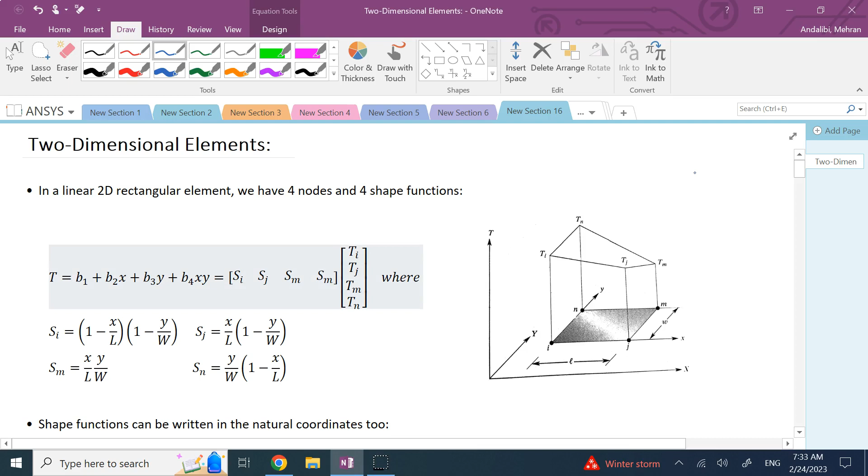We can also write it as the dot product of the nodal values and the vector of shape functions. The shape functions at nodes i, j, m, and n are functions in terms of local coordinates. We can also write them in terms of natural coordinates, using the parameters xi and eta, which are defined based on x, y, l, and w. Then we write our shape functions in terms of these two parameters.

If you remember, we put the origin of the natural coordinates at the center of the element, so the four corners have values of positive or negative 1 for xi and eta. These are the shape functions, and each one is 1 at its own node and 0 at all other nodes. The same properties that applied in 1D now apply in 2D.

So this was the linear rectangular element. Along each edge, whatever the quantity is—temperature or otherwise—it changes linearly. Now we might have a higher order rectangular element, which we call quadratic, or second order.

Here you also have four nodes in the middle of the edges, so you have 8 nodes and 8 shape functions. Written in terms of natural coordinates, this time you don't just have linear and bilinear terms—you have quadratic terms as well, and it also gets to the product of linear and quadratic. So you need 8 coefficients, giving you 8 shape functions and 8 nodal values.

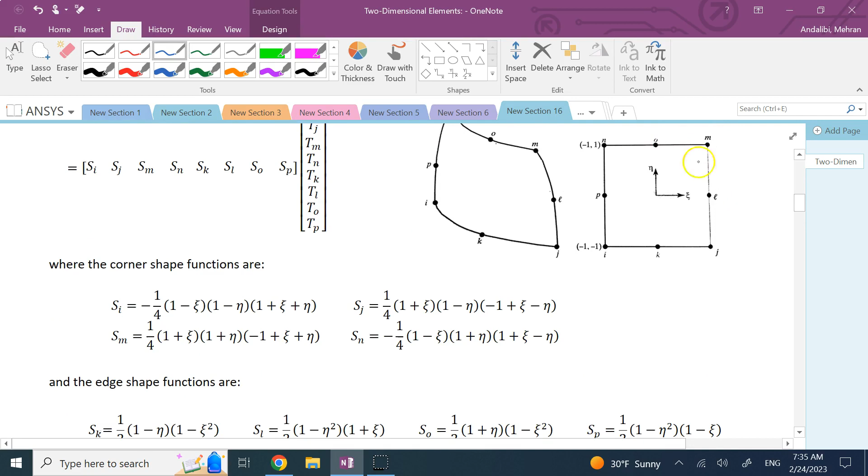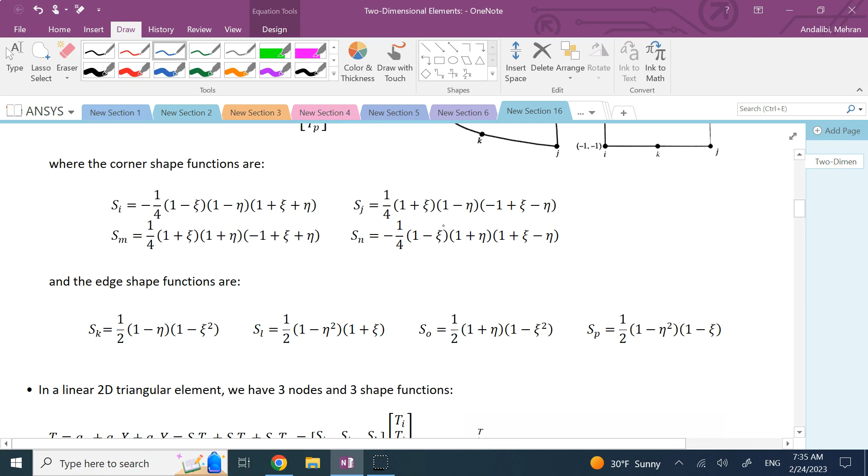The corner shape functions, at i, j, m, and n, are given by these functions, and the edge shape functions in the middle, k, l, o, and p, are given by these other functions. The same properties apply here—they are 1 at their own node and 0 everywhere else. So this is the quadratic rectangular element.

Now we can go to triangular elements, first linear, then quadratic. For the linear one, there are only 3 nodes and 3 shape functions, so we need 3 coefficients in the polynomial, written in terms of global coordinates. For triangular elements, we mostly deal with global coordinates instead of local.

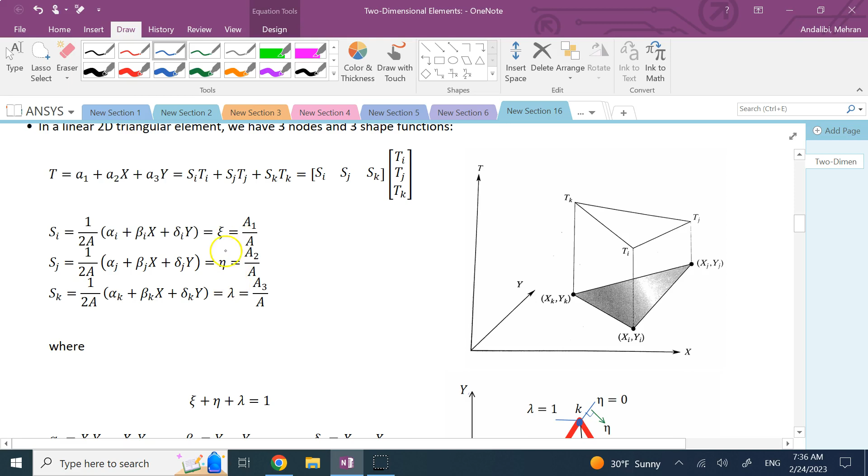So you have 3 shape functions, determined based on the parameters alpha, beta, and delta, and A, the whole area of the triangle. These shape functions are also the same as your natural coordinates, and they are the same as the ratios of A1, A2, and A3, which are the three areas split by a specific point P.

If you move point P anywhere, these three areas change, and the coordinate of P changes—it's the ratio of these three smaller triangle areas over the big triangle. So the sum of these three parameters equals 1, and your alphas, betas, and deltas are given based on the global coordinates of the corners.

So when I deal with global coordinates, I really need two coordinates, x and y. When I deal with natural coordinates, I need three of them, but one depends on the other two—so you have one redundant coordinate. In general, these are your shape functions. As I said, it's always easier for triangular elements to define everything in terms of global coordinates.

But for rectangular elements, it's most of the time easier to define everything in terms of the local coordinate, although here we also have a natural coordinate as well.

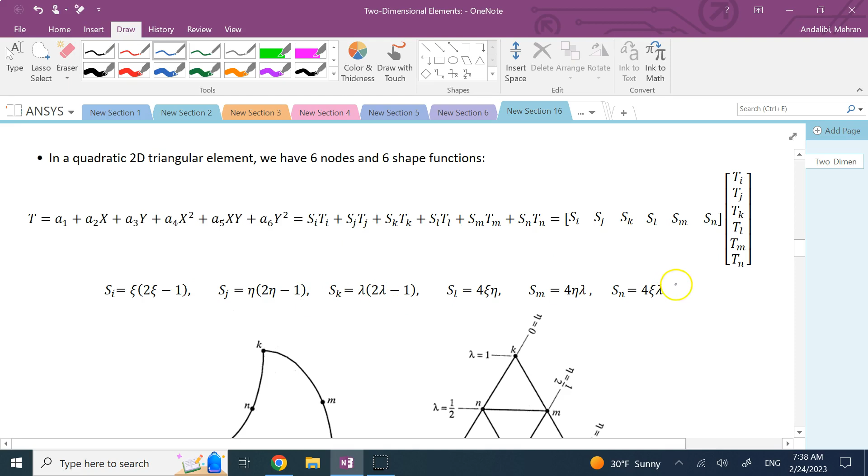And then, of course, we have the triangular element which is quadratic. Now we also have one node in the middle of each edge, so we have 6 nodes and 6 shape functions. The 6 shape functions, again based on the natural coordinate, are given as you can see down here, based on xi, eta, and lambda.

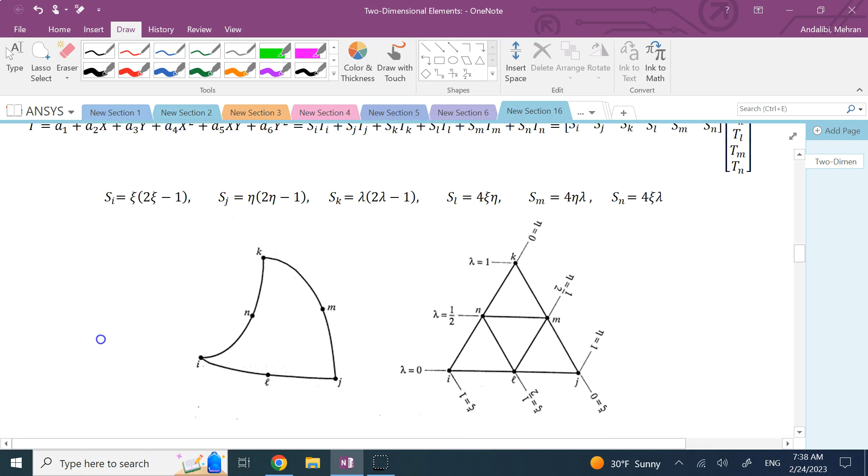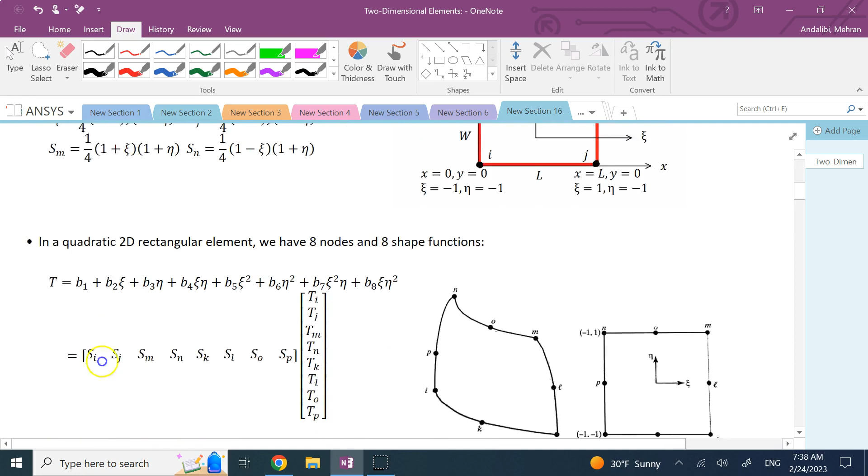So these are the 4 most commonly used 2D elements that you can use in finite element. There are others, but we're going to skip those for the sake of time.

So the next problem that we're going to see as a real example is analysis of 2D heat transfer problems. The governing equation inside the physical material is basically kx times the second derivative of t with respect to x, plus ky times the second derivative of t with respect to y, plus q dot, where q dot is the amount of heat generated per volume. So this term is going to be 0.

So this is basically the net heat coming inside the element and outside, the sum of the inside and outside. Here we can assume that the conductivity of the material K is not the same in x and y. Most of the time these two parameters are the same, but if the material is not isotropic, then these two could be different.

Q dot is the amount of heat generated inside the material, inside the volume, per volume. So if there is some heat source or heat sink in the part, this number is going to be a positive or negative number.

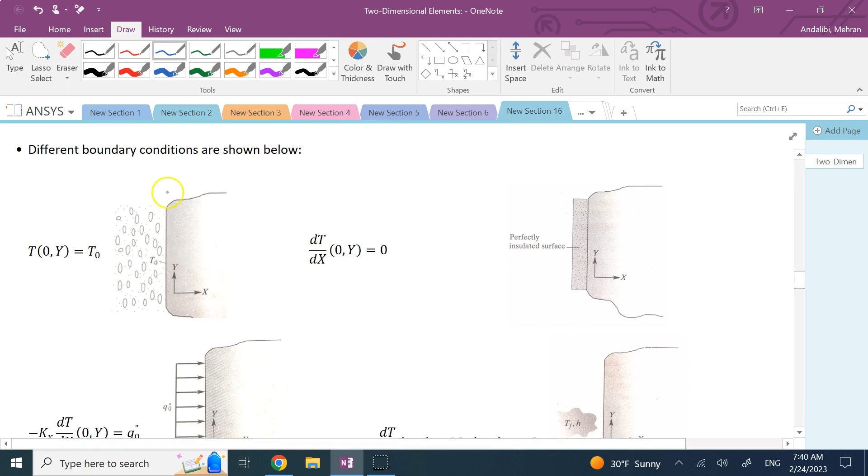And then there are different boundary conditions. We can have constant temperature at some edge, for example on this vertical edge where x is 0 and y can change, then the temperature can be held constant. We can also have the condition where the material is perfectly insulated on that edge, meaning the derivative in the x direction for temperature at that location is 0. Now if the edge is horizontal, then the derivative of temperature in the y direction is going to be 0 for that direction.

Which means the heat flux, Q double prime, which in this case is ky times that derivative, should be equal to 0. In this case, this is kx times that derivative, but kx is a constant, so we can cancel it from both sides. So the edges could be horizontal or vertical; in this case, we just consider vertical edges.

Then we have a constant heat flux through that boundary. If we know how much that constant heat flux is, then this is the equation for it. And if it's just an element like anything else, the heat coming through it is equal to the heat given to the environment by convection. So it is subjected to convection, then this is the equation: the heat coming in this direction is equal to the heat going to the environment through convection. This is Newton's cooling law.

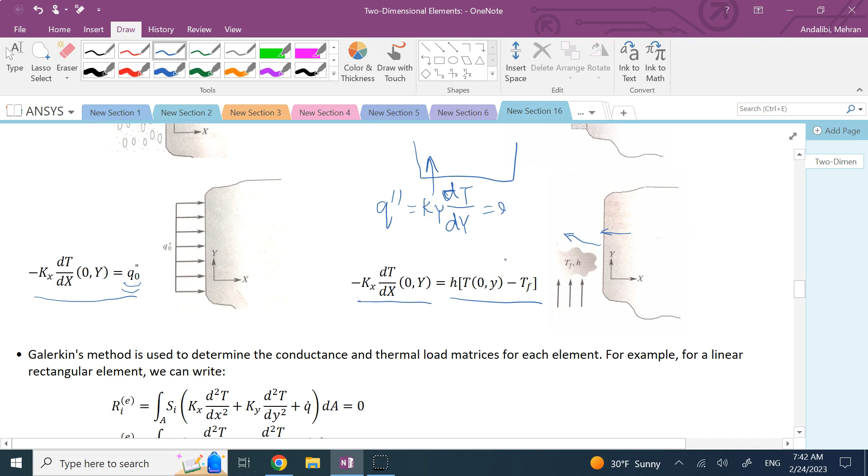So these are different boundary conditions that you can have, and this is your governing equation, second order and linear. This is your basically non-homogeneous term in general.

So here, if we want to formulate this problem, we are going to use the Galerkin's method, just like we did for 1D problems. Then what we do is at different nodes, we calculate the residual terms, multiply them by the weighting functions, and set them equal to 0.

If you remember, the residual terms come from guessing some t as a function of x and y in this case, and plugging it into this differential equation. Since it's not the exact solution, the right hand side is not going to be equal to 0, so we call that a residual term, which you can see here. Then we multiply each residual term by the shape function, or the weighting function, of that corner, that node, and call it the residual term for it. The goal is to get these all to 0.

So then we can write all of this as the residual term for that location times vector s, and vector s here is clearly Si and Sj, and then Sm and Sn transpose, in this case.

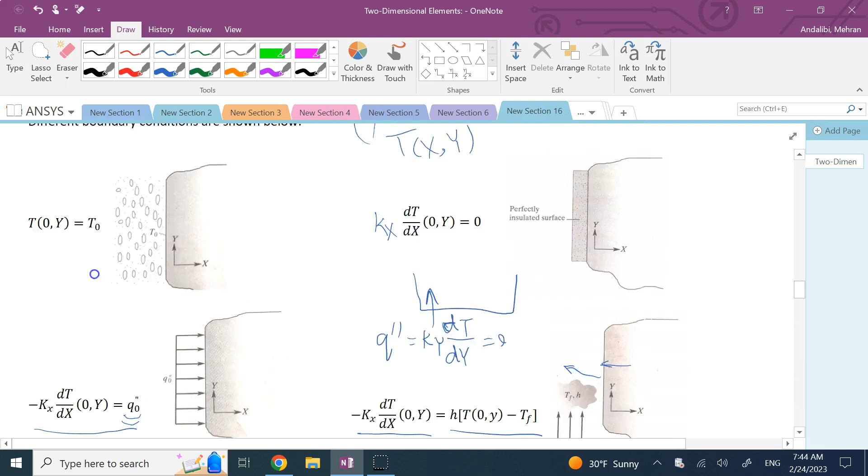So that times the residual term dA equals 0. We get this vector equation, and then we have to do a lot of manipulations here. If you remember, S, I, J, M, and N are these 4 functions that we had up here.

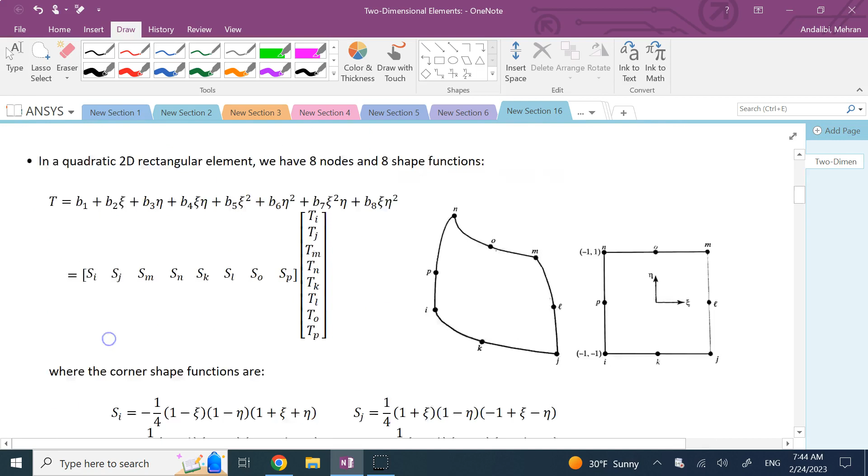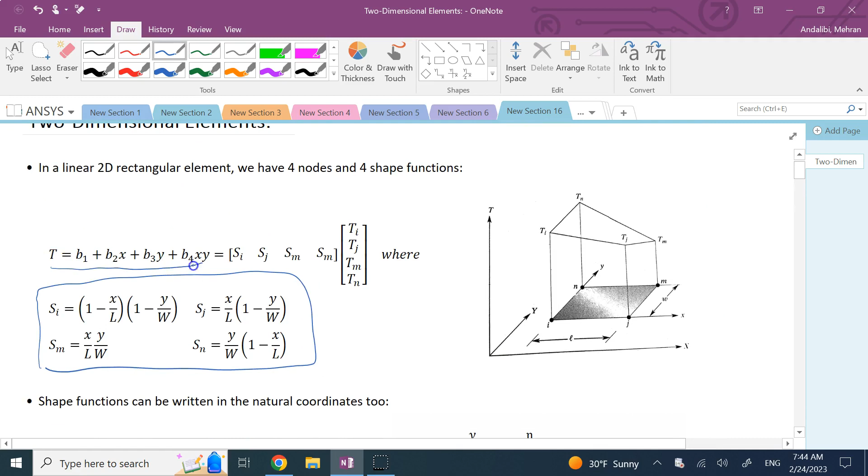These 4 functions, so we plug them in, or in terms of natural coordinates, these guys. We plug them in, we perform the integrations. The t that we have is going to be basically this function. So we plug them all in, we do the integrations over the elements and over the area of the elements.

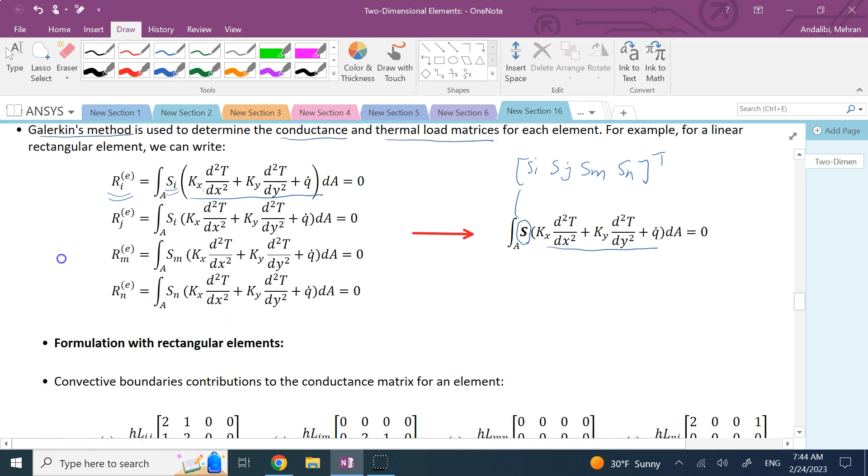And set it equal to 0. Here there is a lot of mathematical manipulation until you get the conductance and the thermal load matrices. So going from here to these results down there, there is a lot of algebra involved, and I'm going to skip those. If you want, please refer to the textbook for more details, and it uses the Green's theorem, okay?

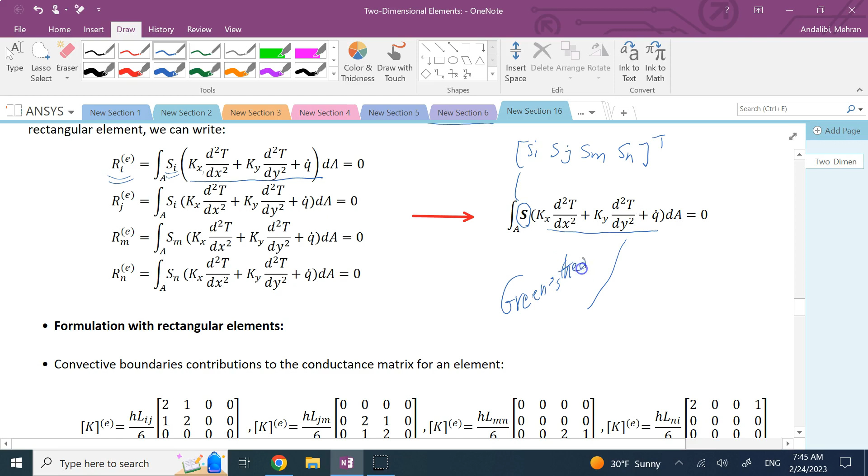So it is going to use the Green's theorem in order to find the matrices that you can see down here. So for derivation, please refer to the textbook.

Now here, depending on what element you have, you're going to get different matrices. And the elements we are going to be using here are linear elements. We are not going to go to quadratics, just linear elements. So I can add something here with linear rectangular elements.

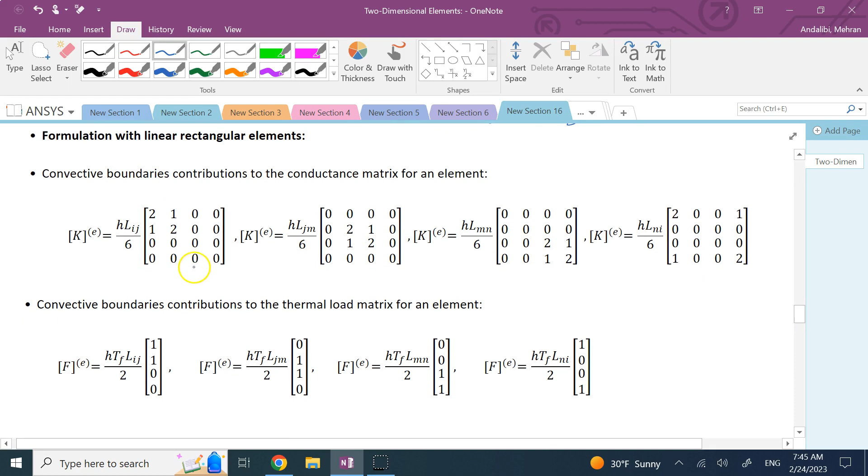Formulation is going to be this, that the conductance matrix for each element has 2 terms that you have to add together. One is due to the conductance itself in the x and y direction, and this is that term here. So just because of conductance from one element to the other, each element has a conductance matrix, which is the sum of these 2 elements. This is for x direction conductance, this is for y direction conductance.

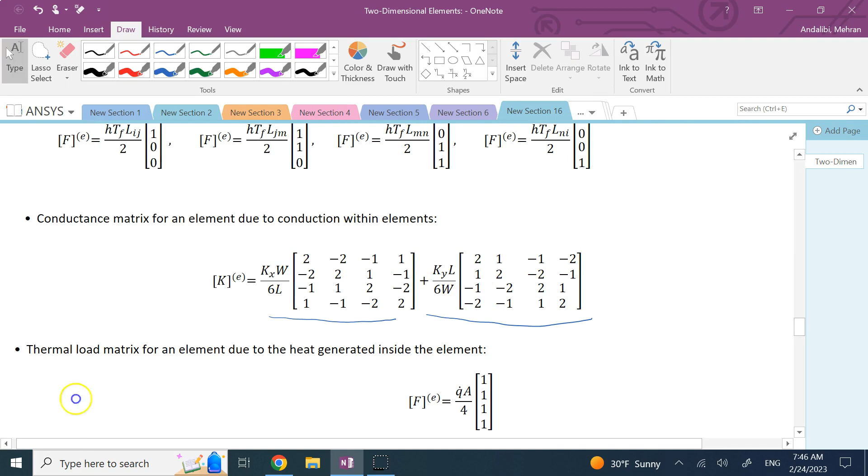And also the convective boundaries, the edges of the rectangular element that have convection with the environment, they also have a T term and they contribute to the global conductive matrix.

Because remember, at the end of the day, the goal is something like this: K global times temperature nodals equals the thermal load global. So whatever has a T in it in the differential equations or the boundary conditions will be contributing to this global conductance matrix.

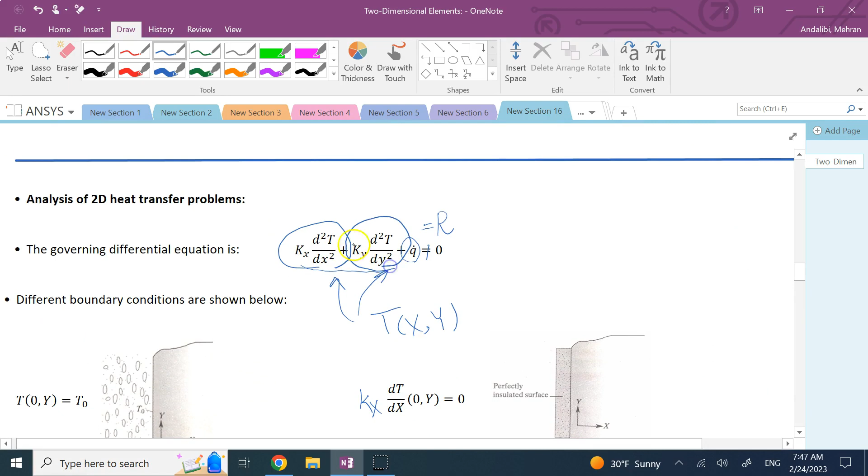And of course, you clearly can see that these two terms will have T in them, so they would definitely contribute to the global K, and these are the contributions.

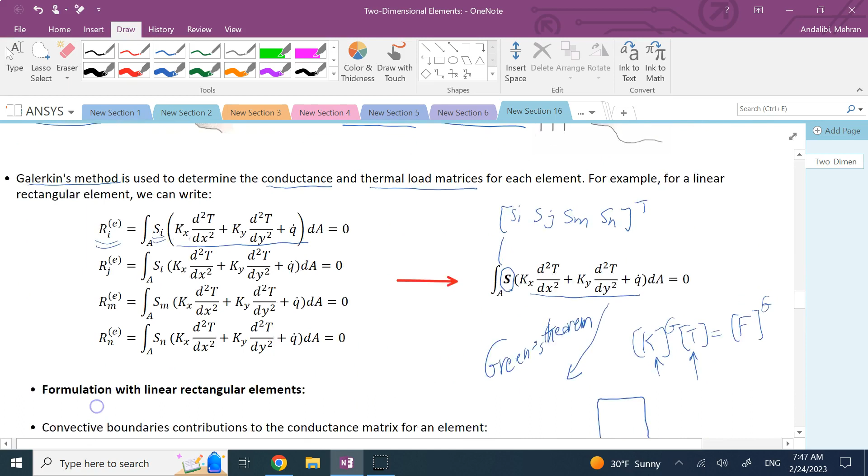The other things that will contribute, as I said, are the convective boundaries. And where is it that they have T? Here you can see that convective boundaries have a T term in them. And because of that T term, there should be some contribution from these to the conductive matrix, and the H term should appear in that. And this is exactly what it is that you can see here.

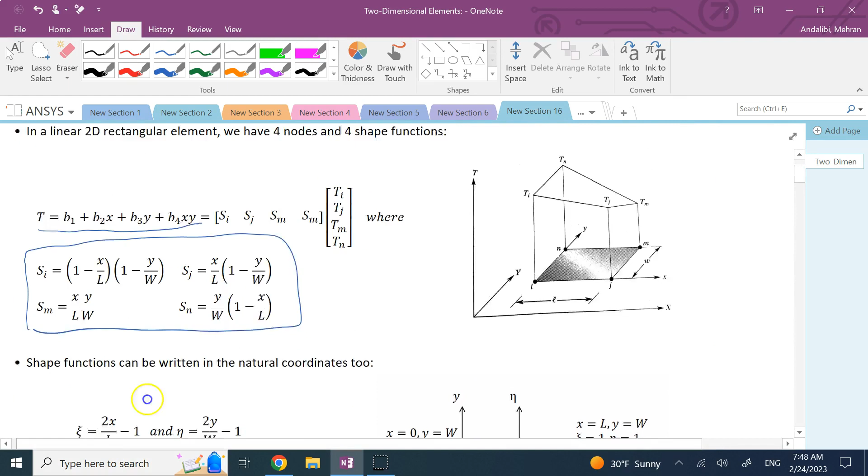These guys are going to be your contributions from convective boundaries. Now, what are these? Each one of these formulas is for one of the edges. If the convection happens through the ij edge, then use this term. If it's happening through the jm edge, through the mn edge, or through the ni edge, then each one has its own matrices. Go back to your rectangle here, you see that I have ij edge, I have jm edge, I have mn, and I have ni edge.

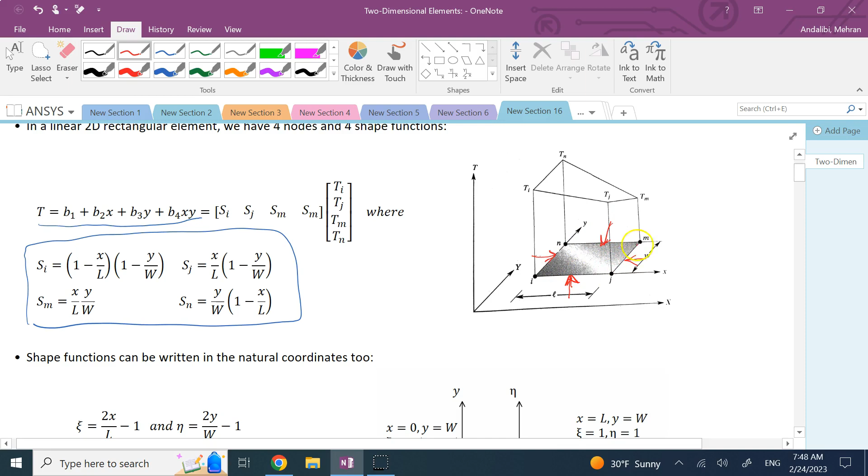So depending on which one of these has convective heat transfer to the environment, then you will use one of those. If all of them do, then you use all of those, and you add them together. So here is the contribution from the convective edges, depending on which edge it is.

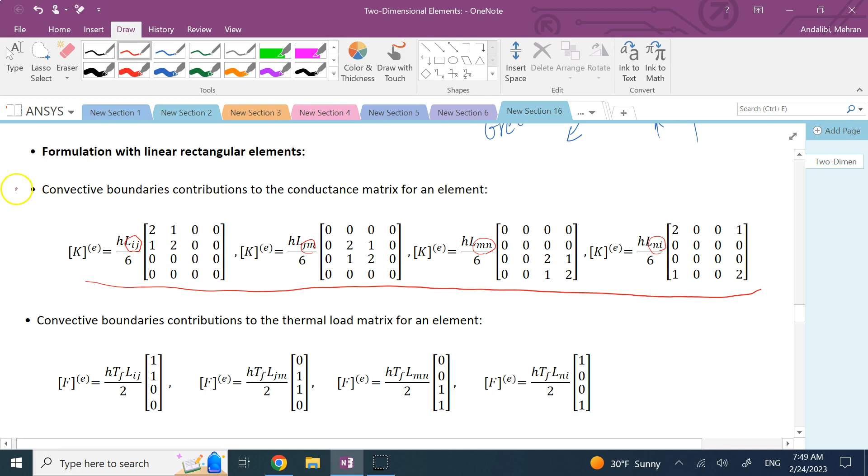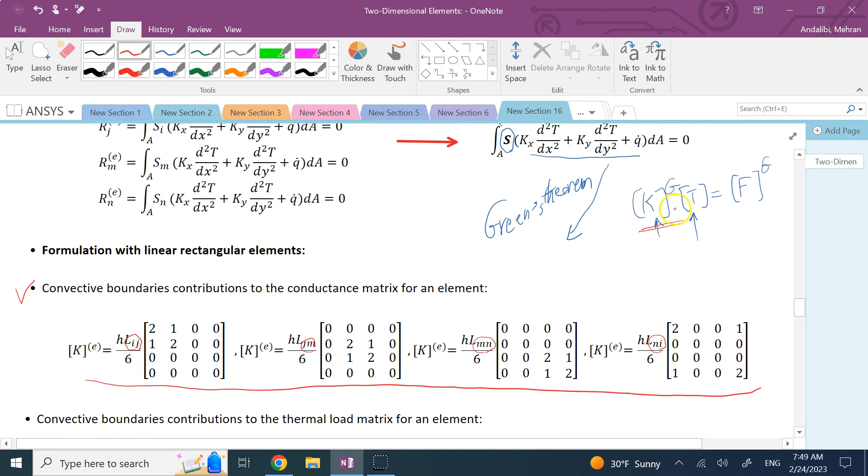So some of these terms, this one here and this one, are going to give you the elemental K, and then when you combine the elemental K, you will get the global K, of course. So the elemental K is going to be the combination of these two.

Now, what about the thermal load, the right-hand side for each element? How would you get that one? So the convective boundaries, of course, have an elemental thermal load matrix. And again, depending on which edge is doing the convection, then one of these terms is going to be applied.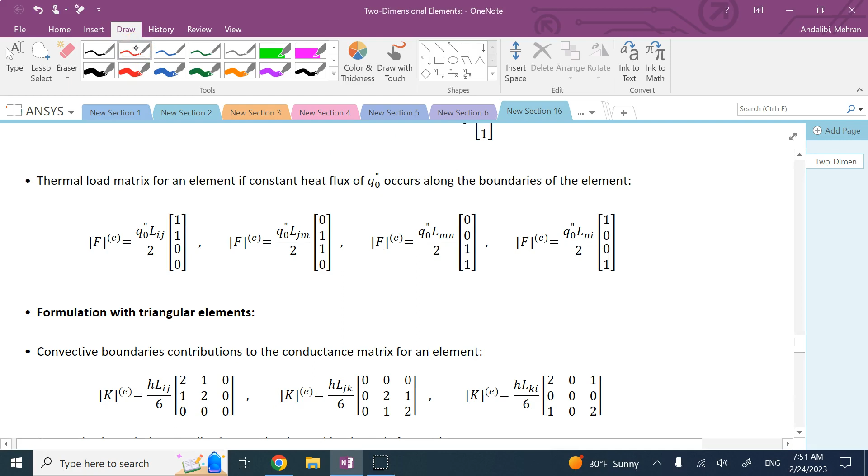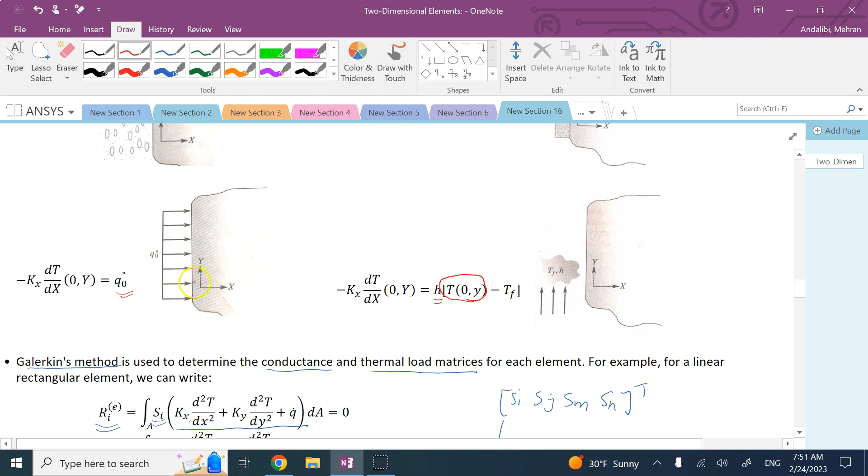There is one other boundary condition that can lead to thermal load, and that is if there is a constant heat flux through that edge, Q naught double prime. That can also lead to a thermal load, and that comes from these matrices here. Depending on which edge has the constant thermal heat flux, one of these or some of them can also be applied. So this one can also lead to thermal load.

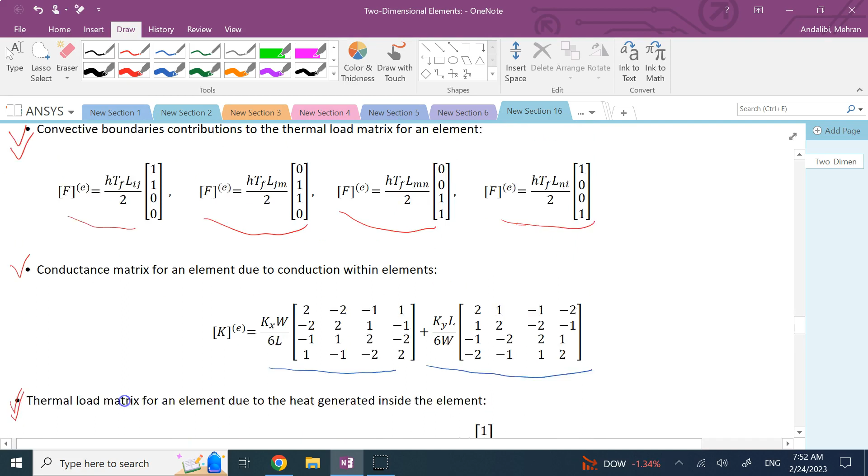So here we have seen the elements of thermal load, and depending on which one exists, we have to add them together. And then we have the conductance elements, right? These are for linear rectangular elements.

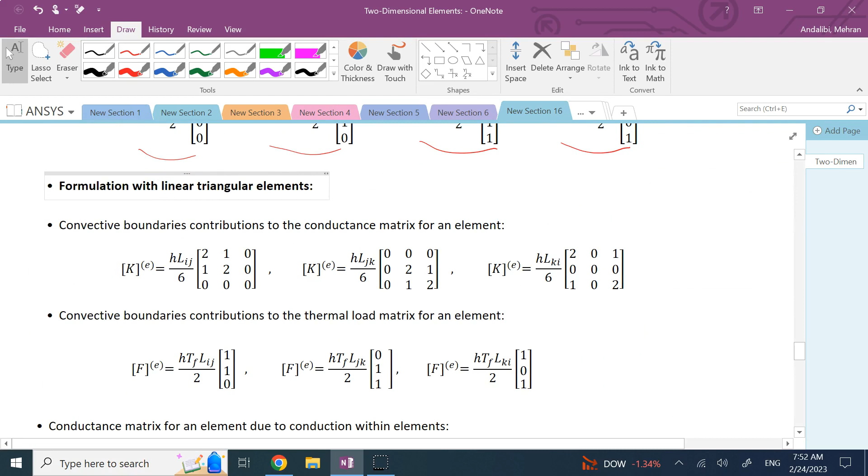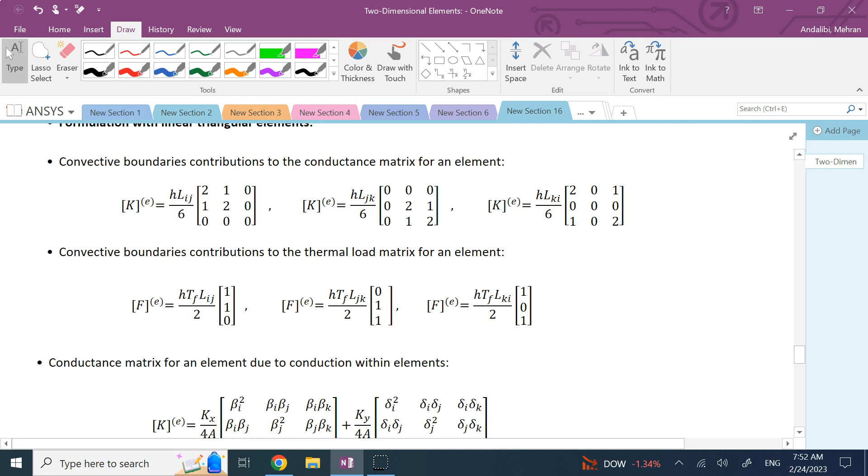Now we can also use triangular elements. When I say triangular, I'm talking about linear triangular elements, not the quadratic ones. Very similarly, the conductance elements are going to be these, due to conductance. And the convective boundaries' contribution to conductance are these, one of these depending on which of the three edges, ij, jk, or ki, will produce that T term. So these two are going to contribute to the conductance matrix for that element.

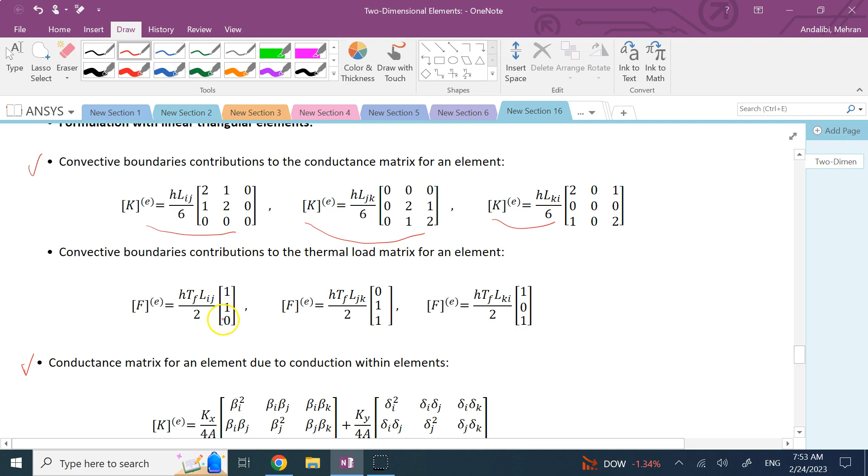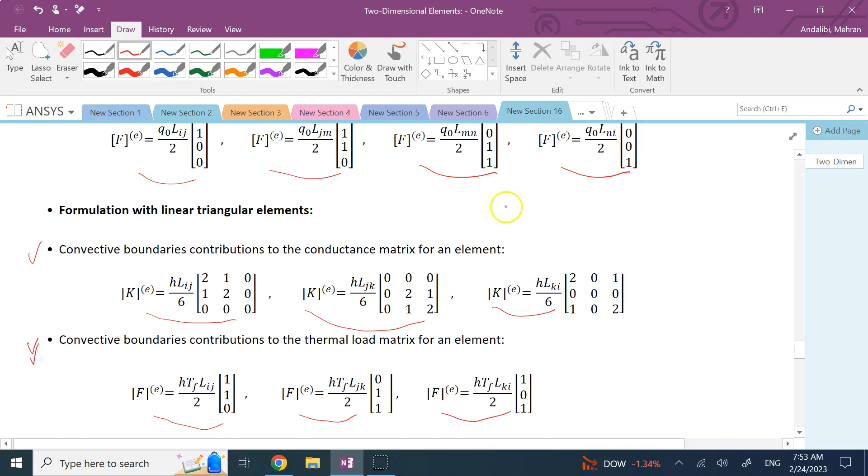Then for convective thermal load, these are the contributions, again depending on which edge is doing it. And then we have the heat generated within the element. And if there is constant heat flux, then we have these. Similar terms here compared to the rectangular element, but you have 3 instead of 4 because you have 3 edges and 3 nodes. And these betas and deltas are the exact same betas and deltas that we had up here.

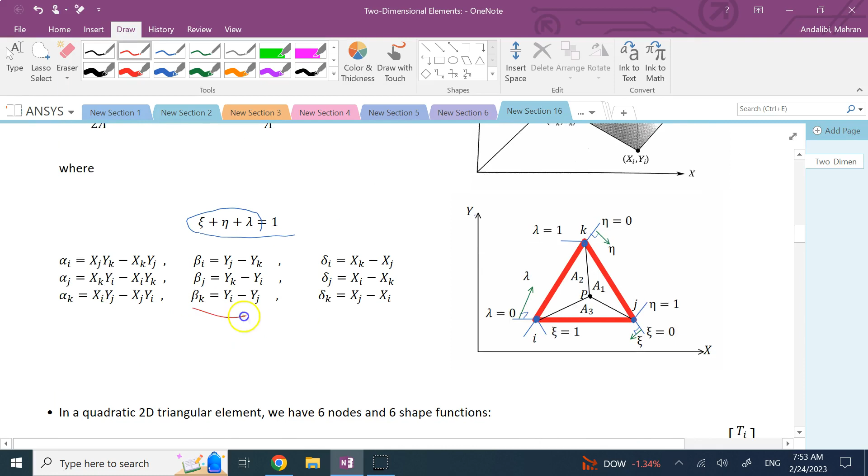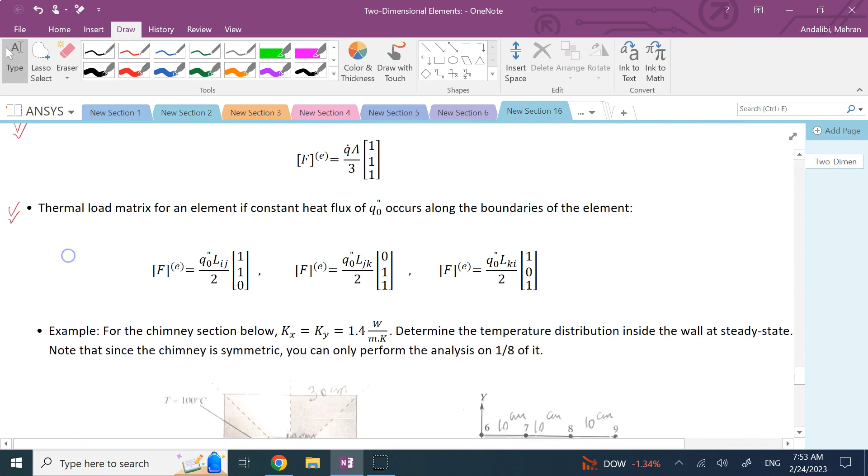So these are the matrices that you need to analyze the heat transfer problem for triangular and rectangular elements. You might say, is there any situation where I need to use both of them, triangular and rectangular? The answer is yes, and you can see that in this example here.

So this is a chimney, and inside of the chimney is 100 Celsius. Outside of it is exposed to the air with H of 20 and 30 degrees Celsius temperature. Kx and Ky are the same, 1.4. We want to determine the temperature distribution within this 2D cross section, at steady state.

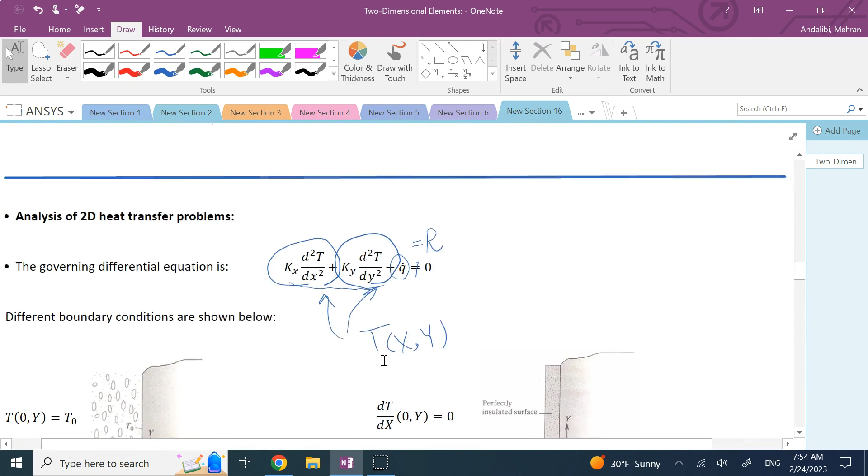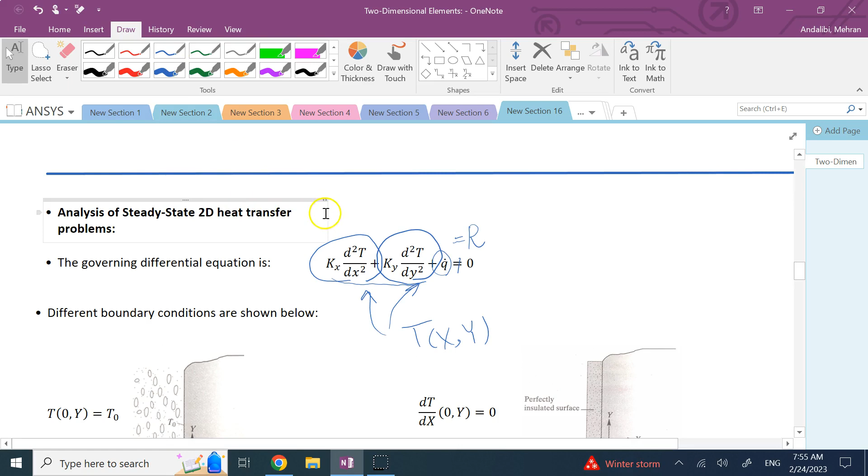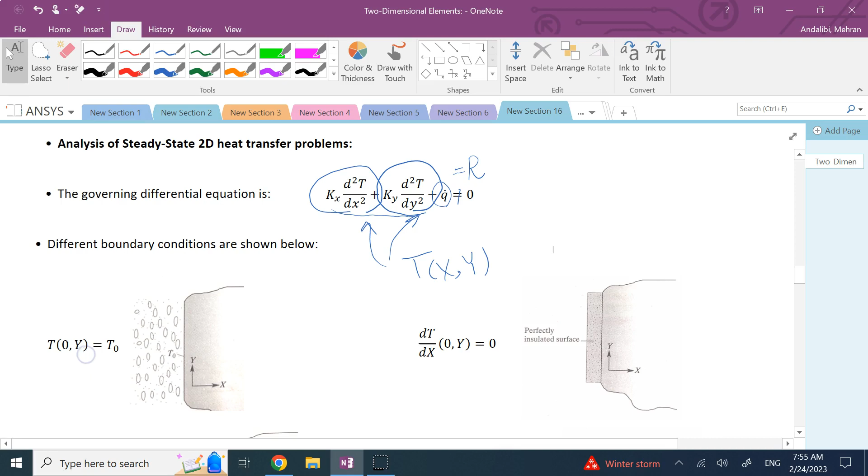Here we are not dealing with the change in the temperature. We'll see the transient heat transfer problems in one of my next videos. All these are steady state. So let me add something here: analysis of steady state 2D heat transfer problems. We are not talking about transients here. If there was a transient, then we also need to consider the C term, the thermal capacity term and the change in temperature. Here we don't see that because we are only talking about a steady state heat transfer problem.

The same applies for my previous video where I did 1D elements. Now this problem is symmetric. If you look, this problem is symmetric, and it has 8 pieces that look like this. There are trapezoids, and the problem is completely symmetric for the X and Y axis. So we don't need to analyze the whole domain, we just need to analyze one of these 8 trapezoids. Everything else will be symmetric for that.

So that's what I do, and that's why I'm going to analyze only one of these. Let's go ahead and analyze only one of these guys. So the dimensions: since the whole thing is 60, then this dimension is 30, and since this middle part is 20, this dimension is 10. Here we're going to break that trapezoid into 3 rectangular elements and 2 triangular elements. The dimension for each one of these is 10, 10, 10. So we have 5 elements, 3 rectangular, 2 triangular, and we are going to analyze the heat transfer within that 2D medium.

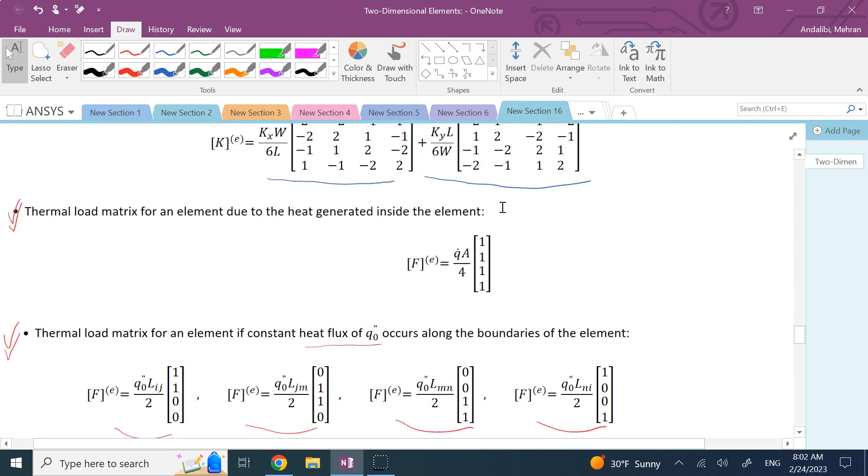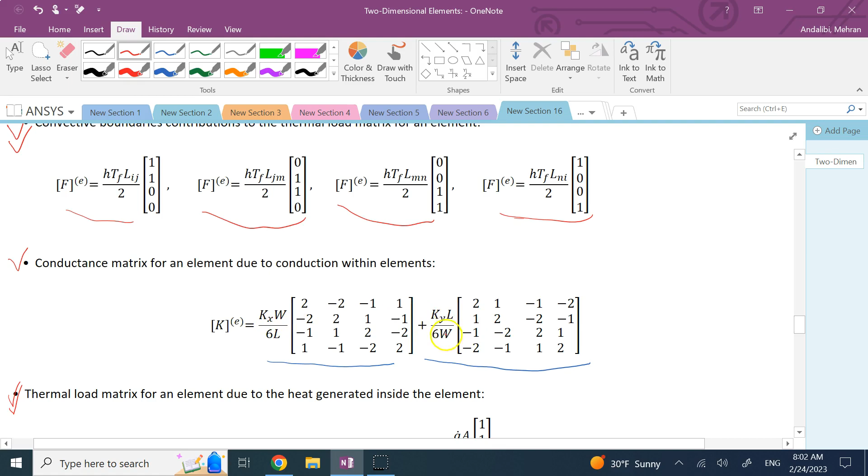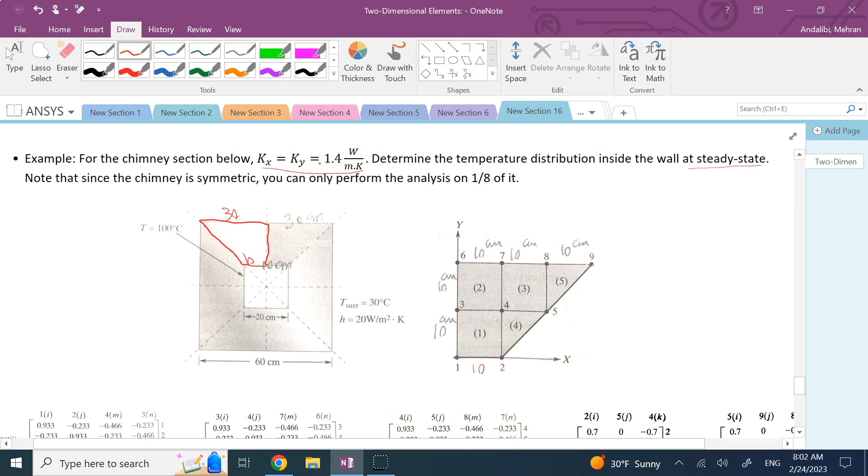Okay, so let's look at the conductance matrices for each element. If we look at element 1, what do we have? Or element 2 or element 3? Well, if we look at this guy here, the shape of these matrices and the entries depend on Kx, Ky, L, and W. For elements 1, 2, and 3, L and W are the same, 10 centimeters. K is also the same, 1.4. Therefore, that contribution is going to be the same, the exact same thing, and I guess you can see that here.

You clearly see that the entries are the same. The only thing different for them is which nodes these matrices are between. So here, the way we numbered the nodes is 1, 2, 3, 4, 5, 6, 7, 8, 9. We went row by row.

For element 1, this is between nodes 1, 2, 4, and 3. Please pay attention, this is not 1, 2, 3, 4, it's 4 and 3. You go around the edges and come back. So you start 1, 2, 4, 3. You don't go 1, 2, 3, 4. You have to preserve the order of the nodes.

For element 2, again, if you look at it, that's 3, 4, 7, 6. And for element 3, it's 4, 5, 8, 7, as you can see here. So that is very important — you keep track of the nodes these entries are written for. The smallest mistake here can easily change your global K matrix.

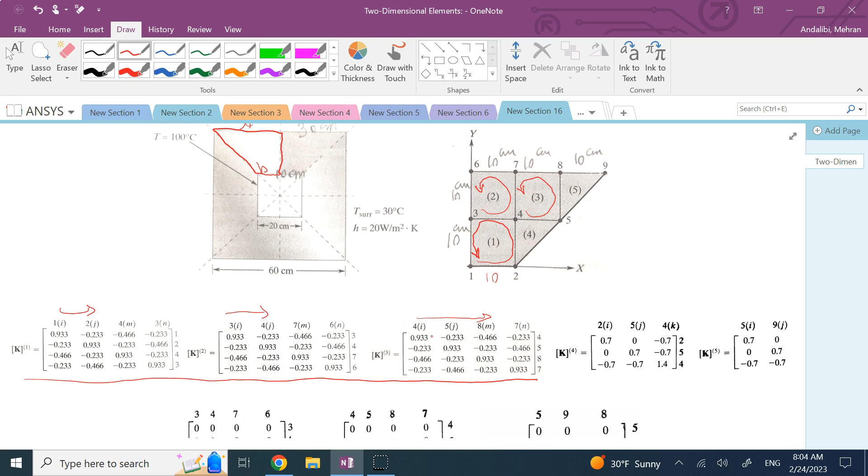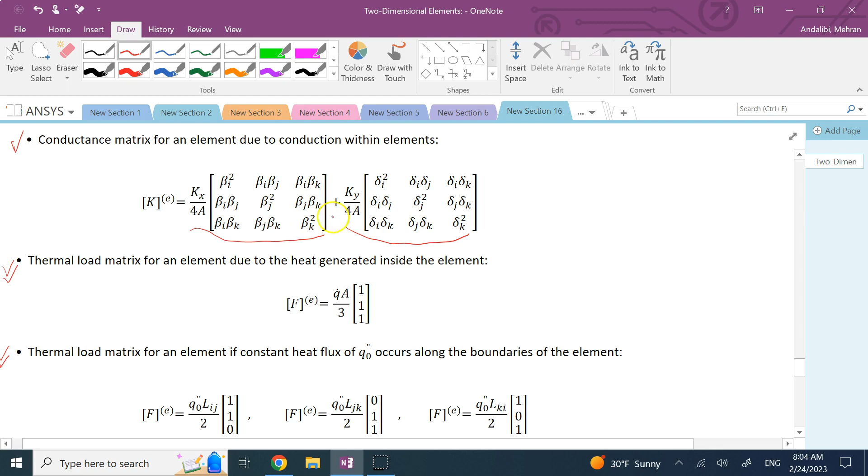So what about elements 4 and 5? If we go and look, this is again the shape, right? It depends on Kx, Ky, A, and A. Also, it depends on betas and deltas, right? It depends on beta and delta here.

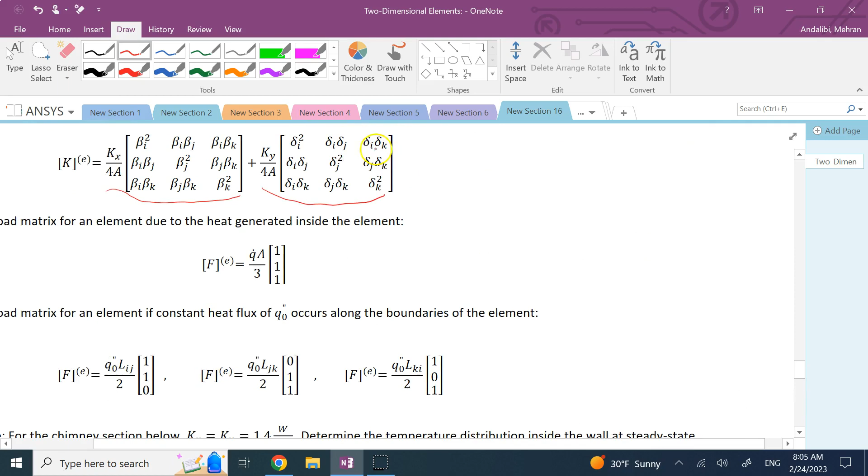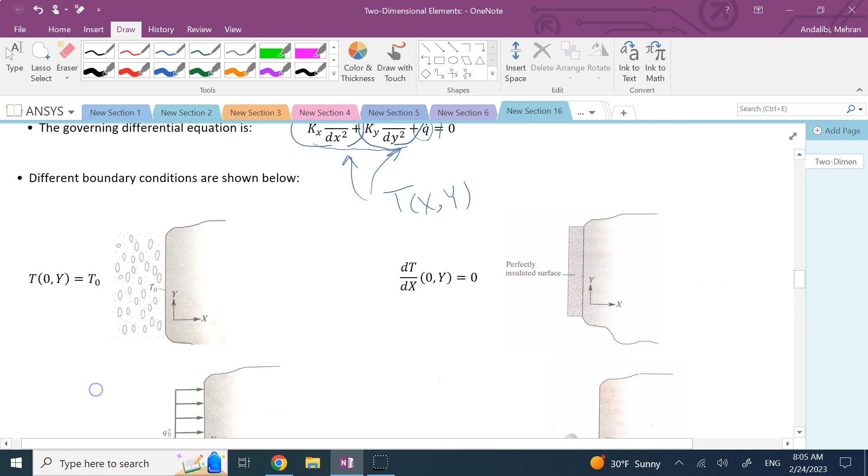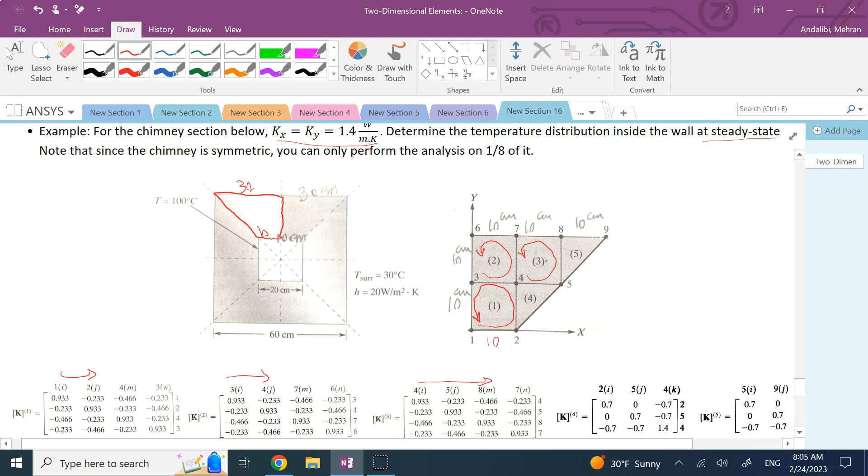If we take a look here, these are the K's for 4 and 5. Now the A's for them are the same, the K's for them are the same, and apparently the combination of deltas and betas — the subtraction and the product — turn out to be the same for elements 4 and 5. Because remember, betas and deltas depend on the location of the nodes, the x's and y's. Here, for elements 4 and 5, the x and y of the nodes are different, but when you calculate beta and delta and multiply them together, raise them to the power and so on in this matrix, it turned out that the overall shape is basically the same.

And again, look at the order: 2, 5, 4, and then the other one is 5, 9, 8, okay? So please pay attention to the orders.

So these are the contributions from the conductive portions, the Kx and Ky. And now it is time to look at the other portion for conductance, which was through the convective boundaries — this guy here, right? It depends on which edges are doing convection with the environment.

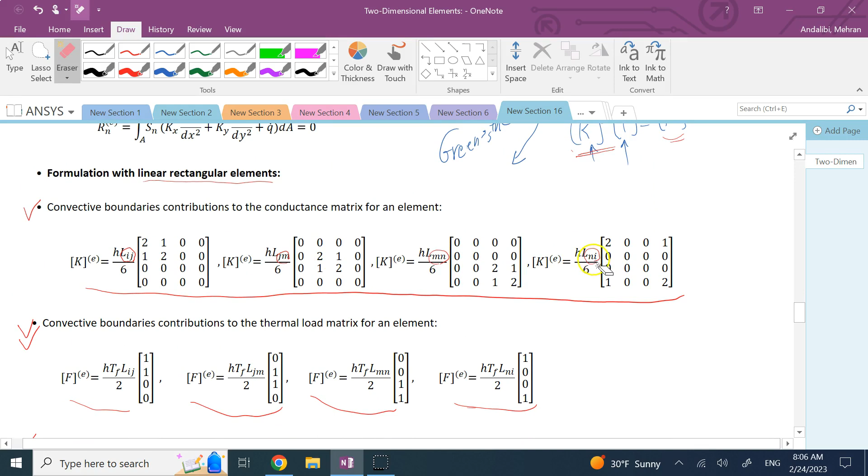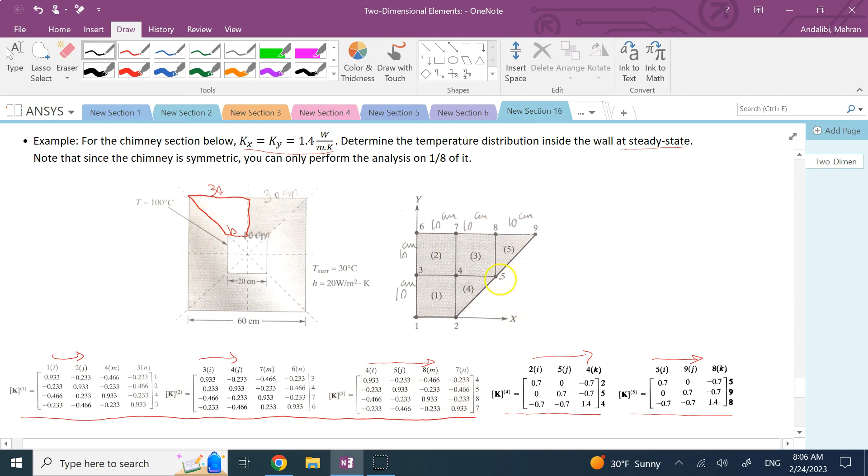Let's go ahead and take a look. Which elements of this guy are doing convection with the boundaries here? Is there any such thing? If we look, elements 2, 3, and 5 are the elements doing convection with the boundary here, through some of their edges. Let's take a look here.

For element 2, which is this element, the term we have is for 7, 6, 7, 6, which is this corner here, this edge here. So that edge is doing convection with the environment. And where is that? Well, the one we are using here is this guy, actually. If you look at the shape, that's this one, and that is right here — it is doing convection with the environment.

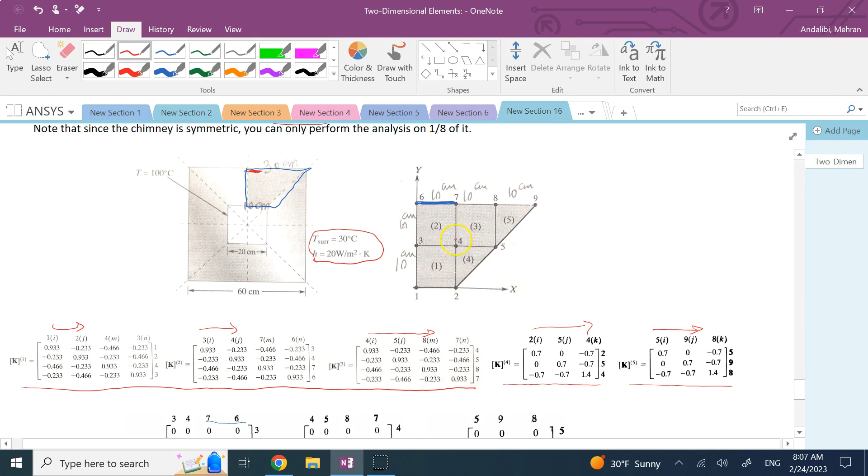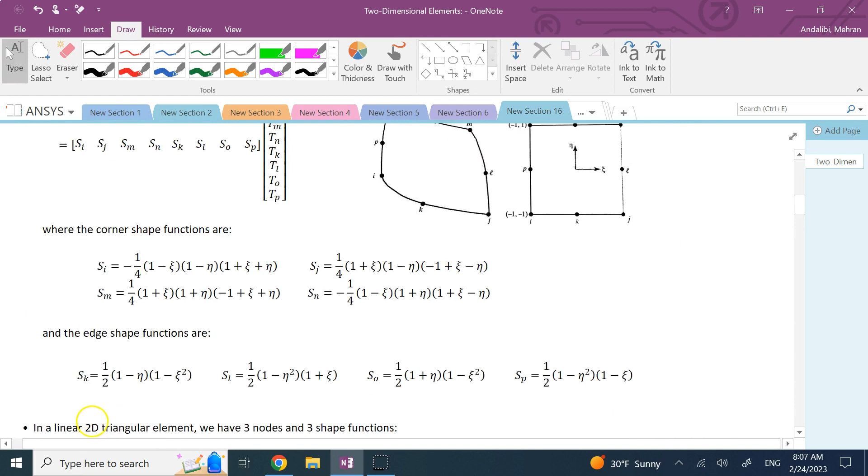And what edge is that? If you consider the order I, J, K — that is the top edge here, which, if we go with the order we have up here, is this edge. It is going from M to N, I, J, M, N. So that's the MN edge for this guy.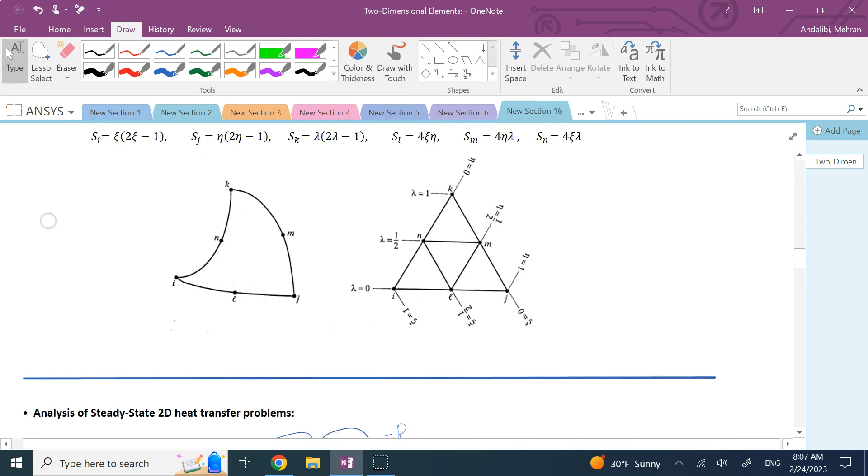And for MN, the shape is — let's take a look at the MN term. So that's this one, and it's this corner here, right? And you can exactly see that in this pattern here. Okay, that's the only edge from element 2 that is doing convection. So we use that MN term, and this is the K2 contribution. Now we have to add these two together to get the total K for element 2.

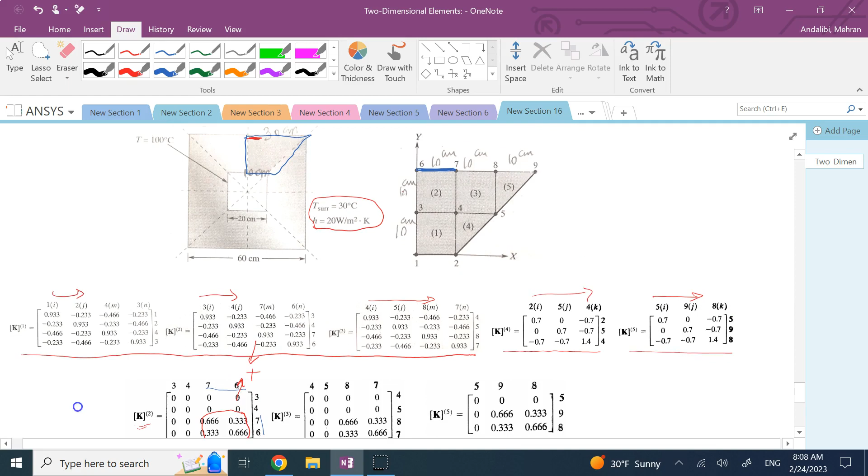What about element 3? Again, it's the exact same thing — it's this top edge here that is doing it, so again we have it on this corner. And then for element 5, again, it's this guy here.

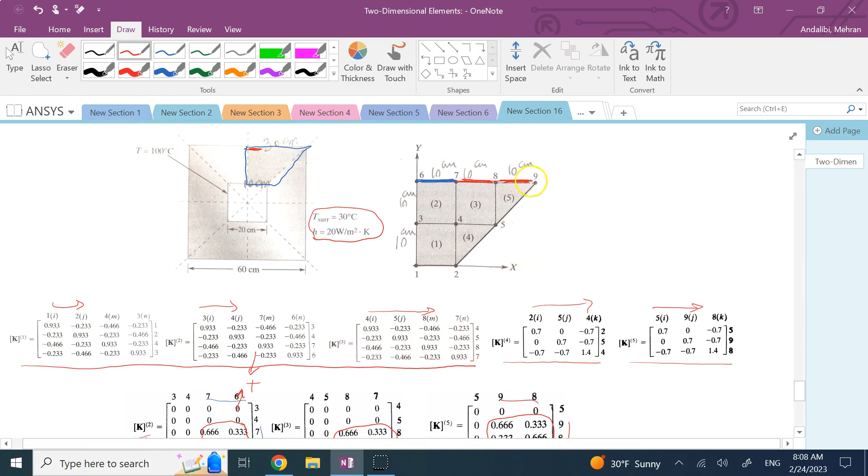And for that one, if we go and look at the shapes, it's going to be this corner again, which is from 9898. And for the other one it's 7878, as you can see.

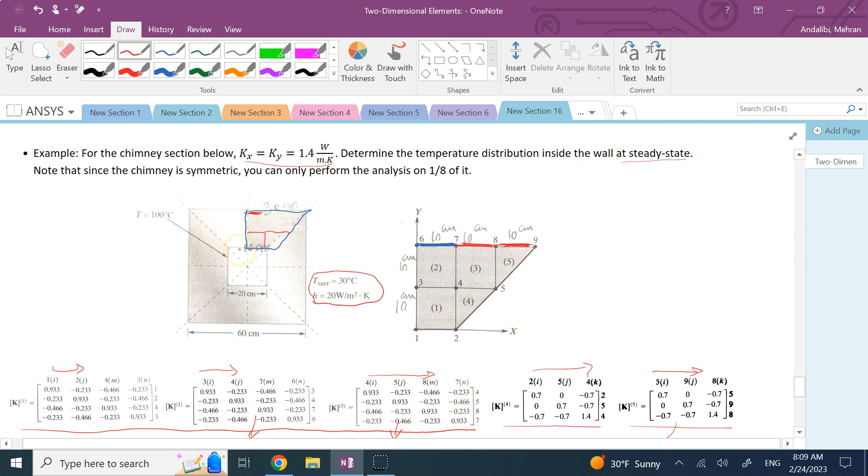So again, for K3, we have to add these two together, and then for K5, again we add these two together to get the total KE for that element. Elements 4 and 1 have no contact with the environment, so they have no convection.

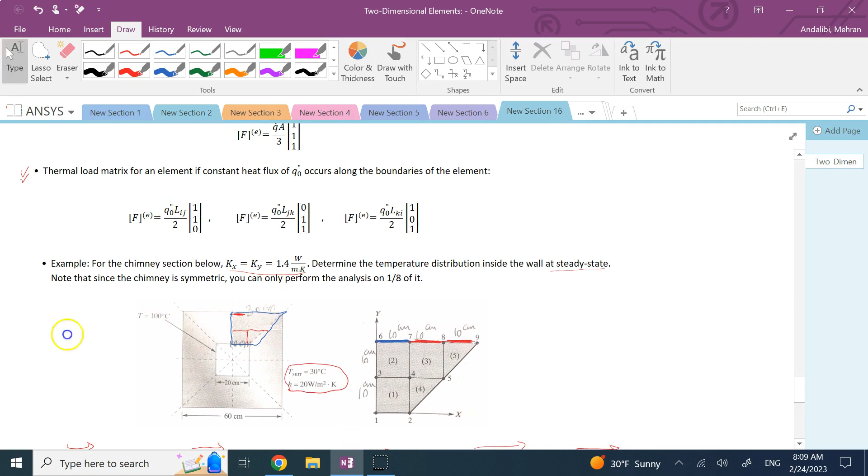Now what about the thermal loads? Let's take a look. In this case, there is no constant heat flux and no Q dot term. There's no heat sink or heat source inside this chimney, and there is no constant heat flux forced through any of these edges.

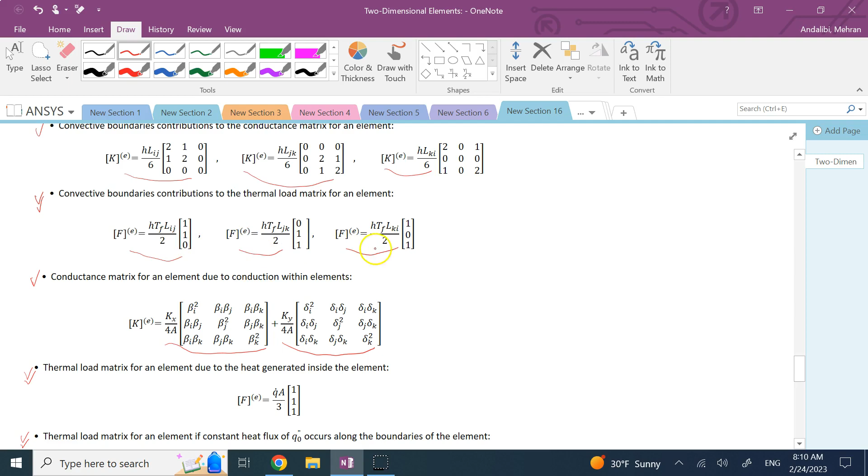So basically, these terms with Q dot and Q double prime are zero. So the only terms we have for any of these elements are due to convection. That's all it is. So basically what you have is this guy here for the rectangulars, and these ones down here for the triangulars.

Now, which edges did convection? If you remember, these were the top edges of elements 2, 3, and 5. Therefore, for elements 2, 3, and 5, we have the thermal loads on edges 7-6, 8-7, and 9-8, which are clearly the convective edges.

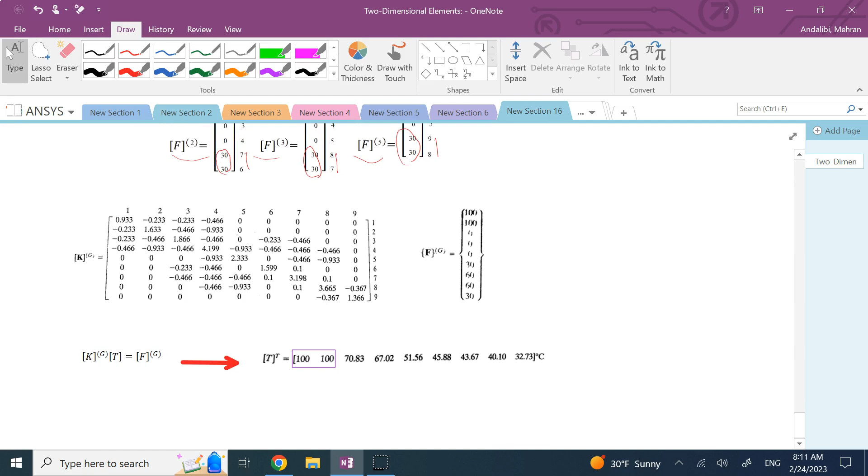Now we're going to assemble the K's and the F's together, and we get the giant F and giant K. Of course it's going to have dimension 9 by 9, and this is 9 by 1. We set K times T equal to F, and we have some boundary conditions here.

What are the boundary conditions? The boundary condition is at nodes 1 and 2, the temperature is 100. Where does that come from? Here, this is node 1, this is node 2, and they are here and here, on this temperature of 100. So those are fixed boundary conditions.

Therefore we basically set those to 100, and then we have 8 unknowns and 8 equations, or 7 equations and 7 unknowns, which we'll get from this portion of the matrix equal to this guy here. If we set them equal, then we should find these other temperatures here.

And if you look at the temperatures, does that make any sense? Well, it says 1 and 2 are 100. Then we go to 3, 4, and 5. The temperatures are 70, 67, 51. And then we go to the convective edges: that's 45, 43, 40, and 32. So you clearly see as you go from the higher temperature of 100 toward the lower, which is 30, you go in this direction.

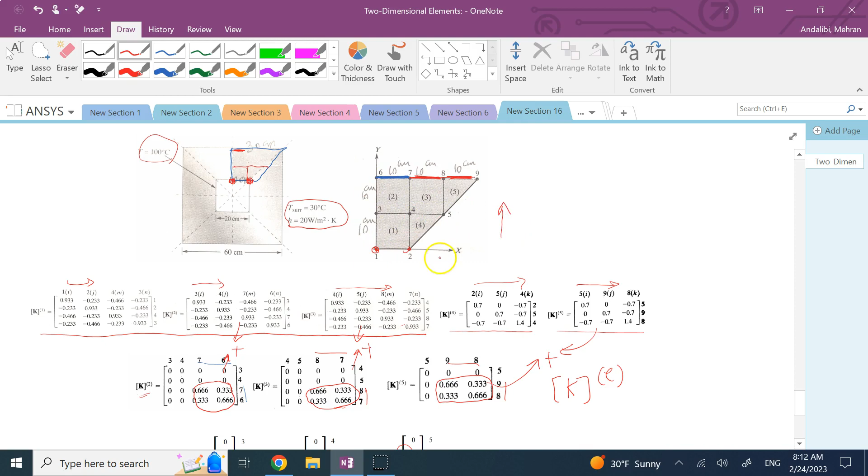Layer by layer, row by row, the temperature is dropping, and that does make sense. The other thing is, as I move from left to right, you see here for these 3 and then for these 4, the temperature is also dropping a little bit as well, and that's because of the distance.

Because the distances of these edges from this constant temperature is increasing. So as I go this way and look at the distance of each one of those nodes with respect to this, I'm increasing the distance. When the distance is increasing, it takes more time for them to reach the temperature, and there is a temperature gradient. So not only is there a temperature gradient in the y direction, there is also one in the x direction.

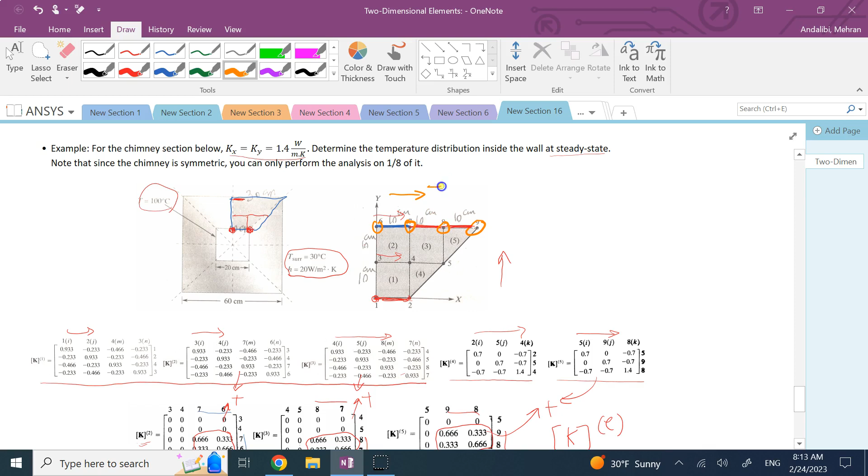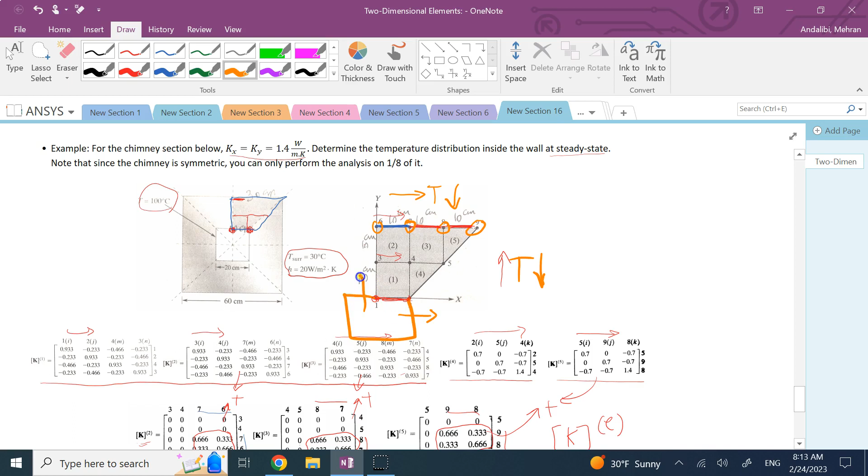And therefore, in this direction, the temperature should go down, and in this direction also the temperature should go down, because the heat source is here. So you have a drop in this direction and a drop in that direction. And you clearly see that it does make sense.

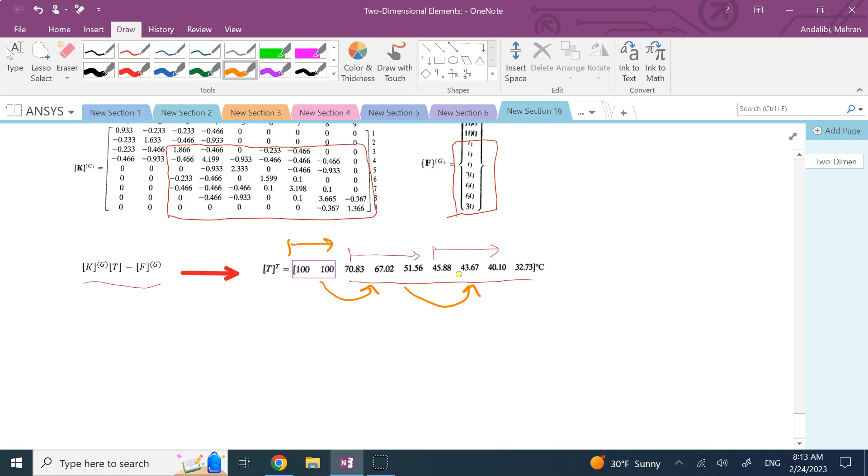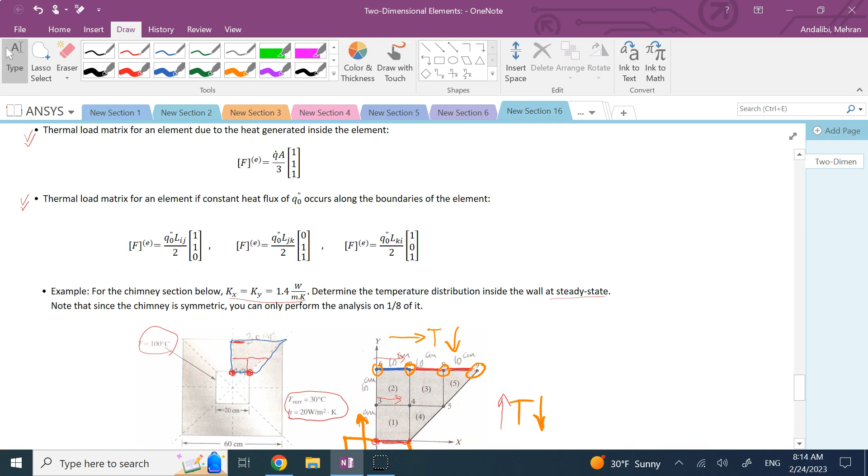So if in one of these temperatures you see that when you go from left to right, the temperature is increasing instead of decreasing, or when you go layer by layer, you see that the temperature, instead of dropping, is going up, there is definitely something wrong. So you always look at the results and do a sanity check. Do not trust anything, because as I showed you, the smallest displacement in any of these numbers will completely change your final results. So always check, make sure your results do make sense.